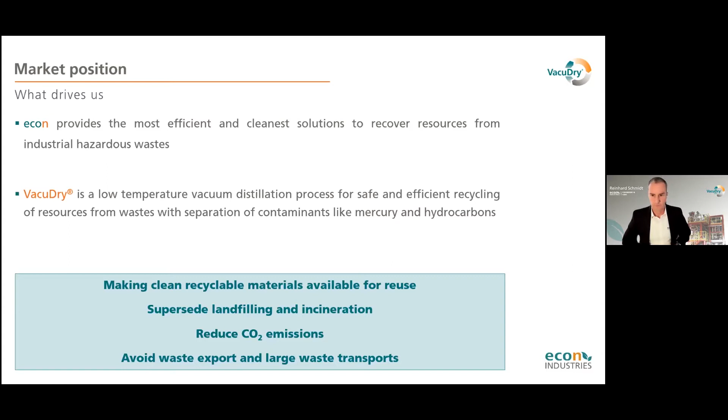Econ was founded in 2003 as a machinery supplier. We are based in Germany, in the southern Bavarian part between Munich and the Alps—a very nice area, by the way. We have been winners of the Export Award of the Bavarian Ministry of Economy in 2018.

We have representatives in many countries, amongst others in the UAE, Australia, Canada, China, and Russia. Internationally, we are very much involved in international working groups, like in the UN, and especially with our mercury activities in the Minamata Convention meetings. This is all based on our VacuDry solutions, where we separate the contaminants and pollutants from industrial wastes.

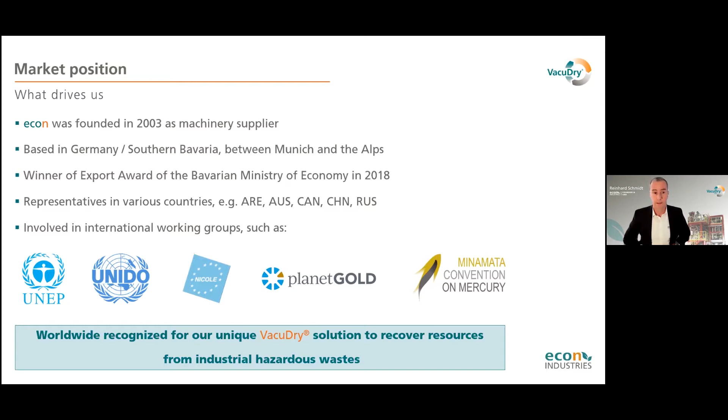Over the years, we have delivered all in all 30 hazardous waste treatment projects, of which 16 are based on VacuDry technology.

VacuDry plants are based on 3 different continents today, in 12 different countries. More than 1,500 tons of solid and pasty industrial wastes are recycled every day in our VacuDry units worldwide, mainly hydrocarbon and mercury-based wastes.

We have experience and knowledge with over 500 different waste streams that have already been treated in these units, including contaminated crushed building rubble and soils, landfill residues, tank sediments, sludges, filter cakes, centrifuge cakes, spent activated carbon and catalysts, and even now metal-containing chips and grinding swarf.

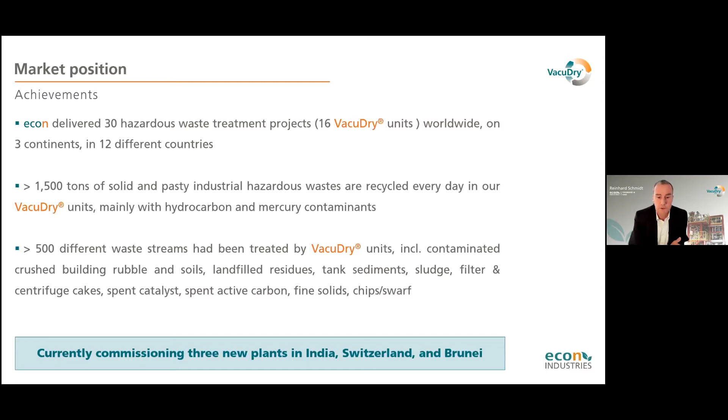At the moment, we are currently commissioning 3 new plants in India, Switzerland, and Brunei.

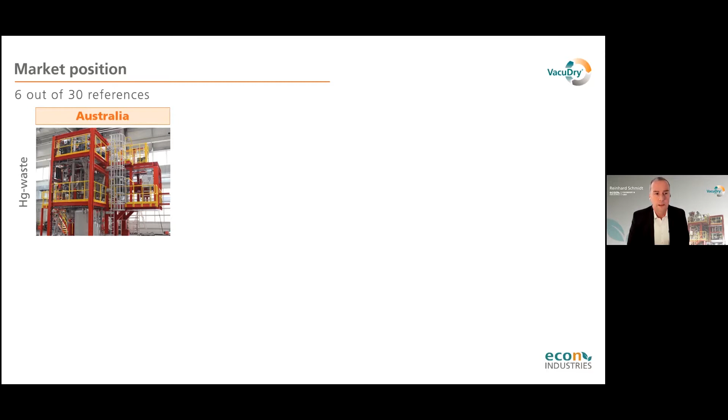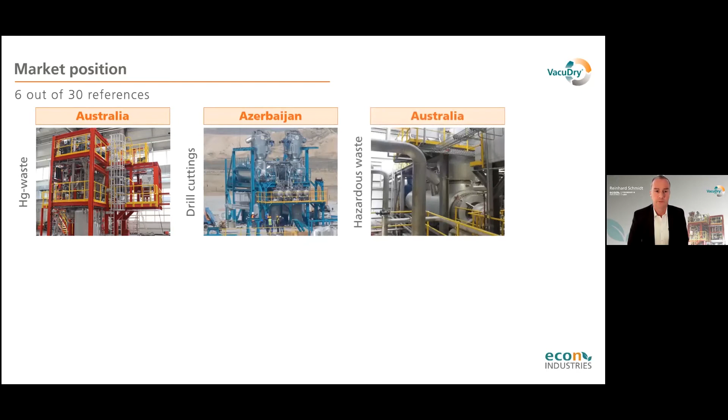Just to show you 6 out of our 30 references: a mercury waste treatment plant in Australia, a mid-sized one, not that large. The next one is 2 drill cuttings treatment facilities in Azerbaijan, dealing with 70,000 tons per year of drilling wastes. Also hazardous waste treatment in Australia, in the Melbourne area, and in Germany, for almost 10 years now, metal sludge treatment, especially grinding swarf from car and bearing manufacturing.

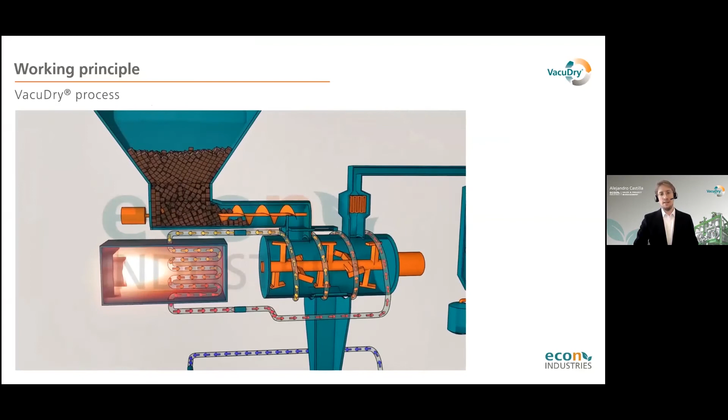I will start with the working principle, with a short video, and in between I will explain how this process actually works. The first step starts with the filling of the unit inside the batch-wise working evaporator, which can range from various types of sludges to contaminated soils and in general more weathered material. During the filling, the auger of the evaporator is rotating, and thanks to the connected shovels, the material is homogenized and equally distributed inside the evaporator.

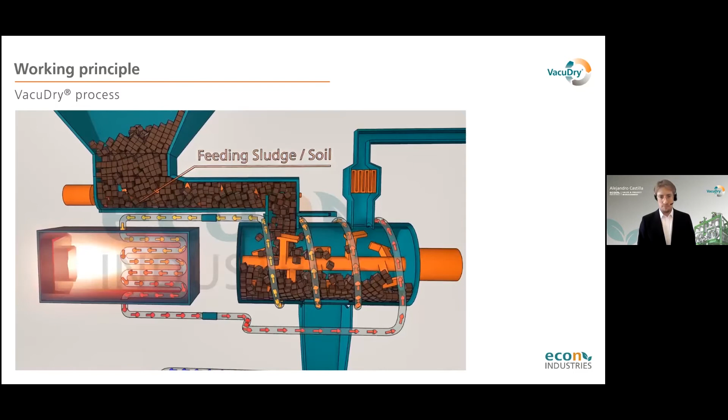Once the filling is complete, a vacuum gate between the filling system and the evaporator gets closed. There is thermal oil flowing in a heating jacket around the evaporator and also in the central shaft, so the material is indirectly heated. It's also important to highlight that the same temperature is applied to a vapor filter system sitting directly on top of the evaporator, which avoids fine material or fine particles passing into the condensation unit.

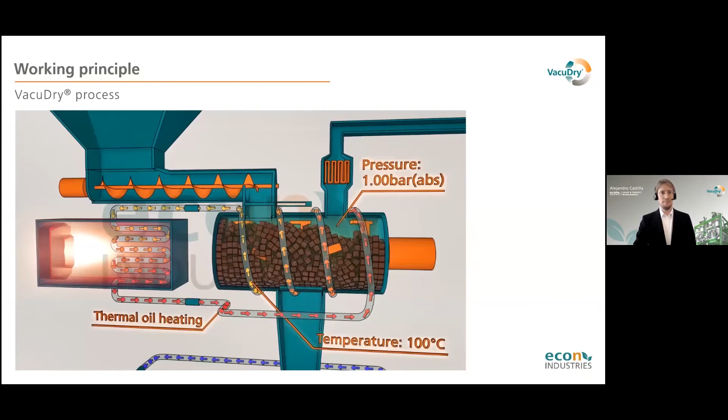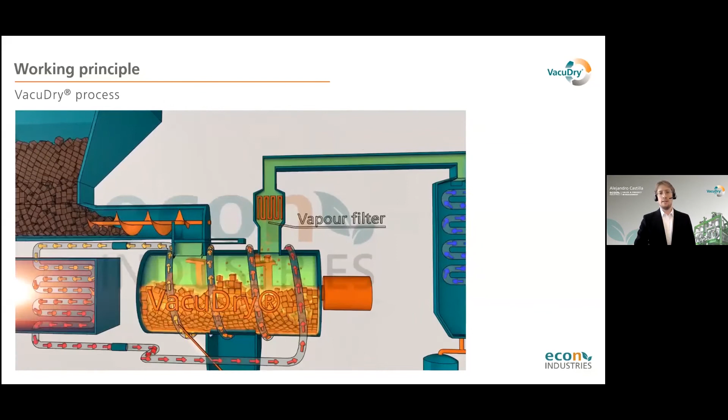During the VacuDry process, the pressure is set to around 50 millibar absolute, and as the temperature rises, the water and different contaminants start to evaporate. The thermal oil has a maximum heating temperature of 400 degrees Celsius, representing an effective material temperature of up to 350 degrees. But considering the vacuum, this corresponds to an evaporation capability at atmospheric pressure of around 450 degrees. In other words, we require on average 4 times less energy than other desorber types.

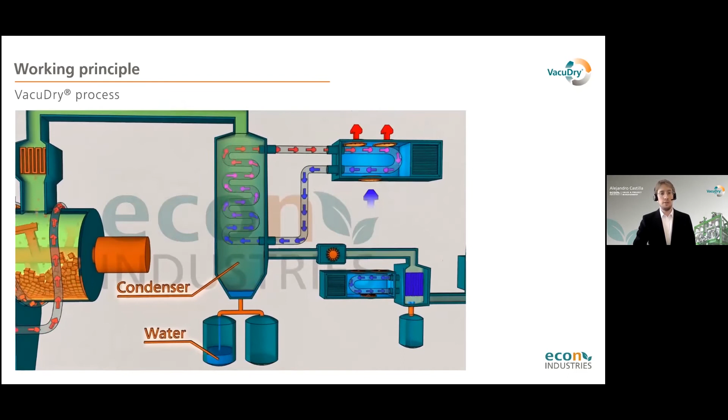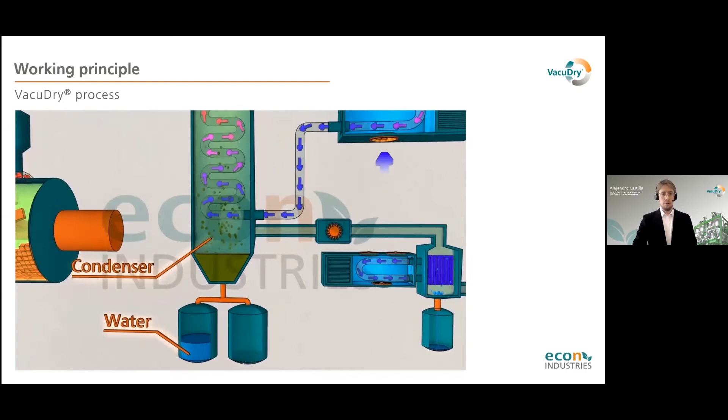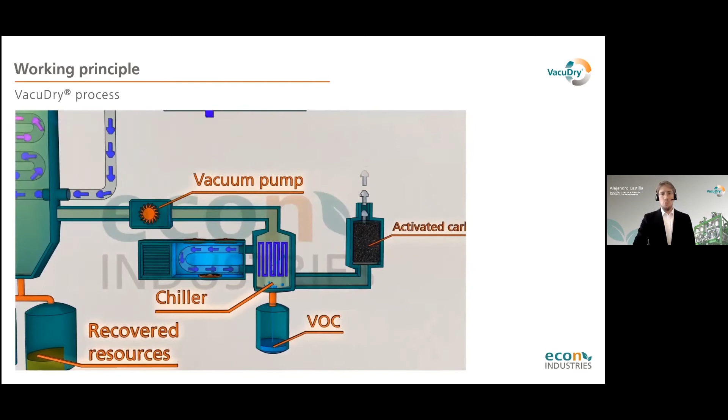The first evaporation and condensation phase belongs to the water content present. Once the material temperature keeps rising, other resources get recovered, so substances that before were contaminants now are recovered resources. The remaining vapors pass through a powerful vacuum pump system where a chiller allows collection of volatile organic compounds, and an activated carbon filter follows before finally releasing the exhaust into the atmosphere.

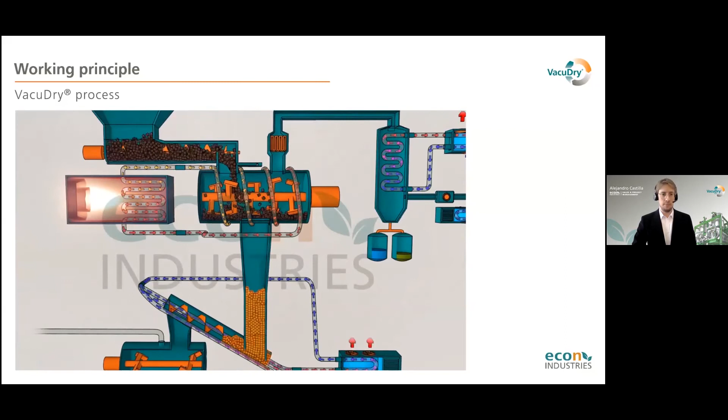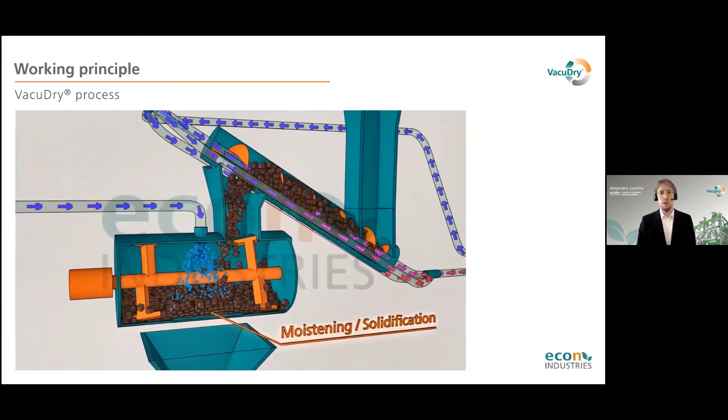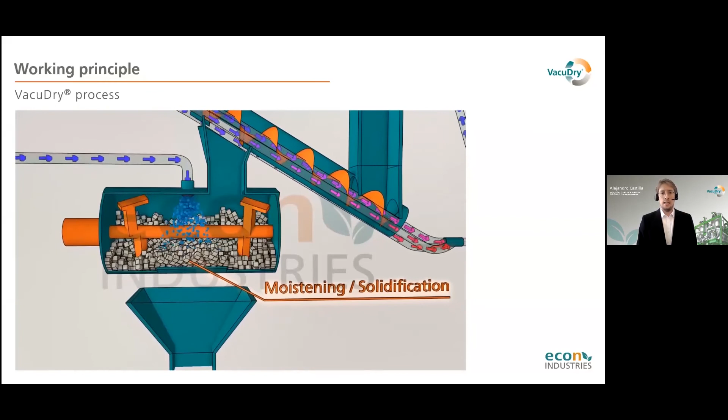Once the batch is finalized, the material drops into the discharge unit and the filling of the next batch takes place. The material has a temperature of around 330 degrees and it needs to be cooled down, so we use cooling screw conveyors and drop the temperature to below 80 degrees. For some customers, it is important to get moisture back into the material so it is not dusty, and this can be done using the water that was condensated and recovered in the previous stage. This way we also have the clean solids.

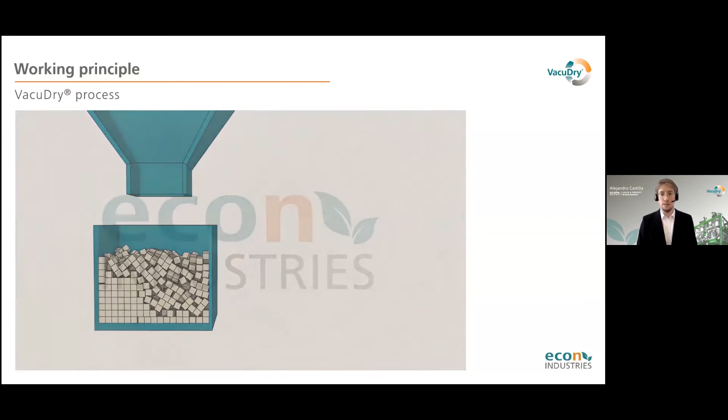Now, another way of presenting the working principle of our plants: this is a flowchart, and I like this version a little more because it shows the modulars, the different modules of our plants. All our plants are executed in a modular design, to reduce transportation costs and to enable fast commissioning and installation on site.

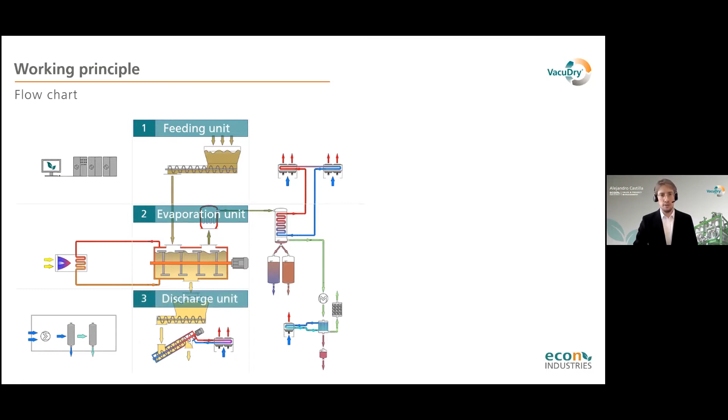The first unit is the feeding unit. Then we continue with the evaporation unit, the discharge unit, the condensation unit, the thermal oil unit, the operating resources module which consists of the instrument air and nitrogen generation and distribution system—for example, for the treatment of oily wastes we need nitrogen in the process—the cooling unit, and finally the control unit. Now I want to speak in more detail about the evaporation unit and the condensation unit. Further units will be explained in other webinars once we tackle specific applications such as metal wastes or oily wastes.

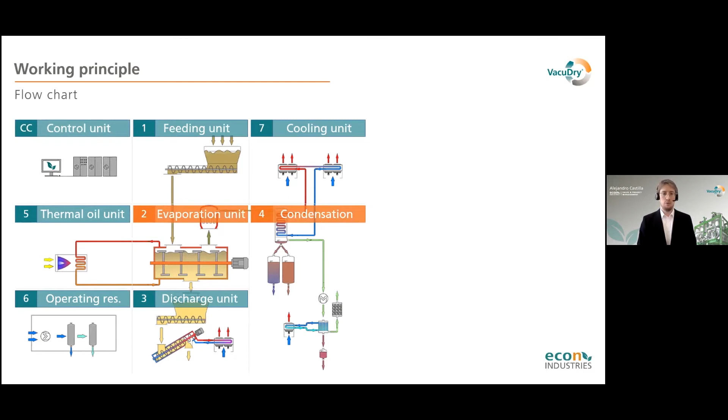Here you can see an example of the installation of a VacuDry 12,000 evaporator. The 12,000 refers to the gross volume of the evaporator, so we're talking about 12,000 liters or 12 cubic meters. We build evaporators ranging from 1 cubic meter up to 15 cubic meters. On the right side you can see the vapor filter system, and in that particular case we have 2 units working in parallel, which is why you have 2 evaporators directly next to each other.

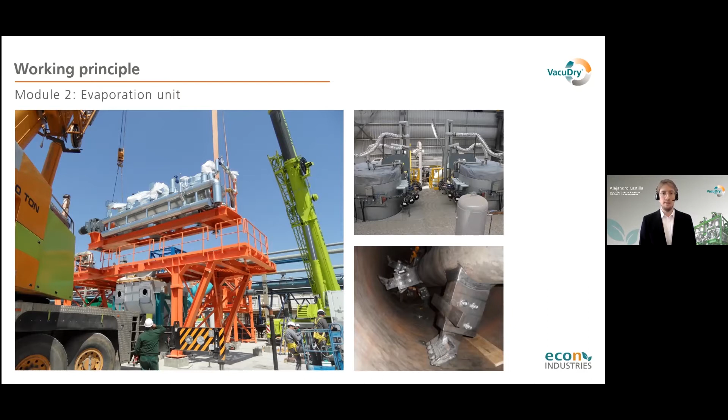In the bottom picture you have the heavy duty design of our evaporators, showing the central shaft and the connected shovels. It's important to highlight that the minimum wear is mainly due to the slowly rotating parts—by slowly rotating I mean around 5 turns per minute.

Next slide, please. Here are 2 examples of the installation of condensation units. The condensation unit in general allows us to recover water and oil and other resources as separate fractions. We also have automatic discharge to storage vessels, as you can see in the bottom right side of the pictures.

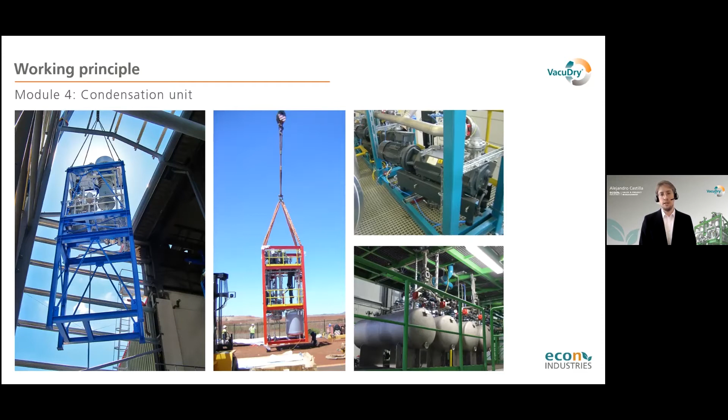Our systems also count with redundant vacuum pumps—for example, you can see there are 2 pumps next to each other, so in case one stops working for any reason there is always a backup. Also, our process design allows maintenance of critical parts during operation.

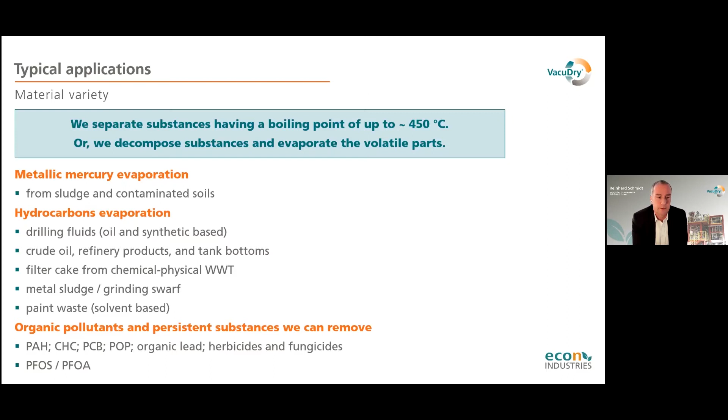Typical applications means we also want to show you the accordant wastes that we can treat. Here we see first mercury-containing soils and wastes on the drier side. Second, grinding swarf, paint wastes and refinery wastes, tank bottoms - more liquid, pasty wastes with high hydrocarbon amounts. We see centrifuge cake and contaminated soils.

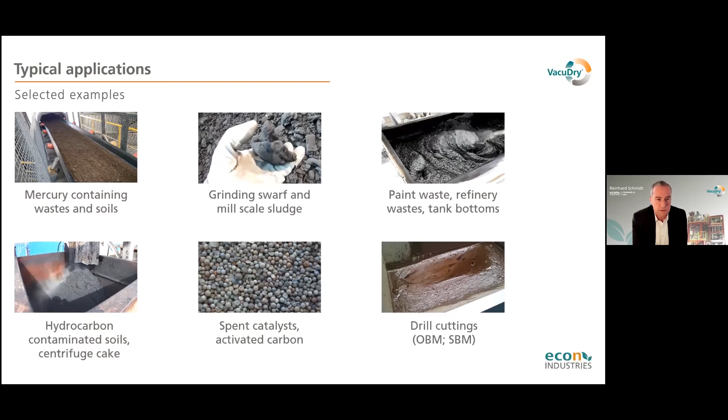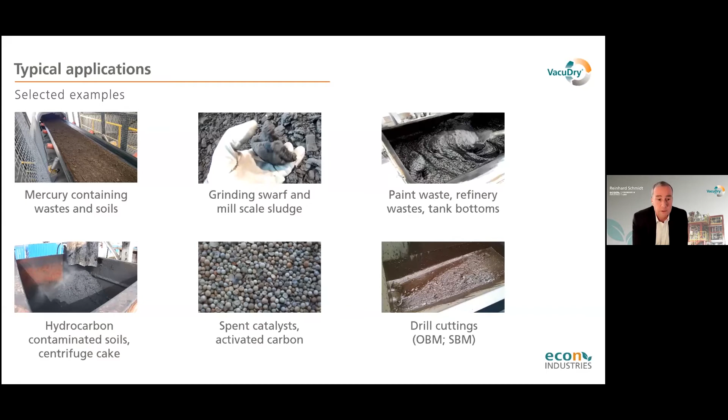We see spent catalysts and activated carbon, and last but not least, nice pumpable drill cuttings, oil-based mud, synthetic-based mud. All these wastes can be treated in the same VacuDry unit - you don't need different plants to treat different waste streams.

The industries we serve - of course we serve most industries that generate hazardous wastes. That's a unique technology for many different types of waste streams. What's important to know is that we treat batch by batch, no need to blend the wastes. So we serve the chemical industry, especially for solvent-based residues and mercury-containing residues.

Especially new applications are the recycling of non-ferrous metals like copper, from copper catalysts for example. Also rare earth materials have been treated and cleaned in our units.

Oil and gas industry - I think I've talked enough about this. Metal-containing sludges is also an upcoming waste stream becoming more important, to substitute co-incineration of grinding swarf. We can do recycling of these kinds of metal sludges, which mainly come from machining operations. Mill scale sludges from the steel industry can also be treated.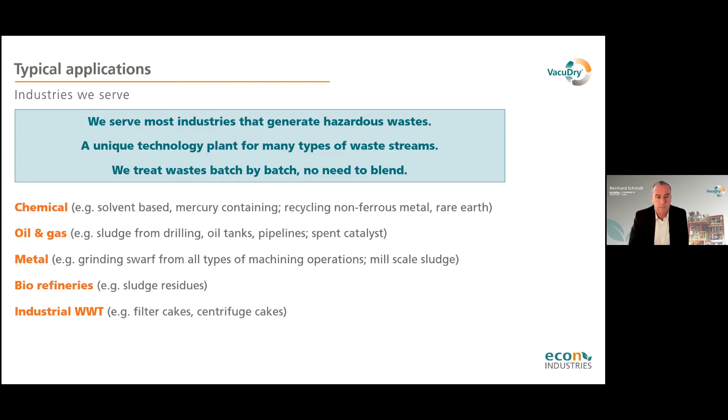In biorefineries, a lot of different sludges occur, residues where we can remove the oil and gain dry solids. Industrial wastewater treatment in general, the filter cakes created there, especially in chemical physical wastewater treatment, are one of our major waste streams that we are working on.

Talking about industrial wastewater treatment and the accordant filter cakes, this is a typical application - a unit that we delivered to Melbourne 5 years ago. VacuDry, in this case, terminated the final disposal of 20,000 tons of hazardous waste in landfilling. We recover the water and hydrocarbons from these wastes and get back a non-hazardous material.

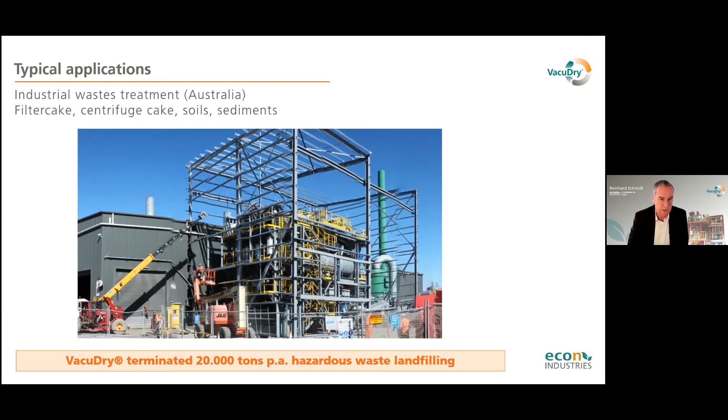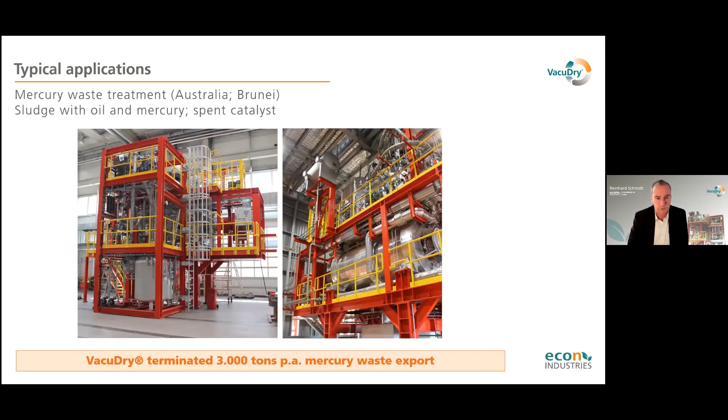With this unit, mercury waste treatment in Australia, we terminated the export of 3,000 tons per year of mercury waste from Australia to Europe.

With this unit, we recycle 14,000 tons of synthetic drilling oil from 70,000 tons of waste. This is based in Azerbaijan, where a large amount of drilling wastes occur from the oil and gas industry.

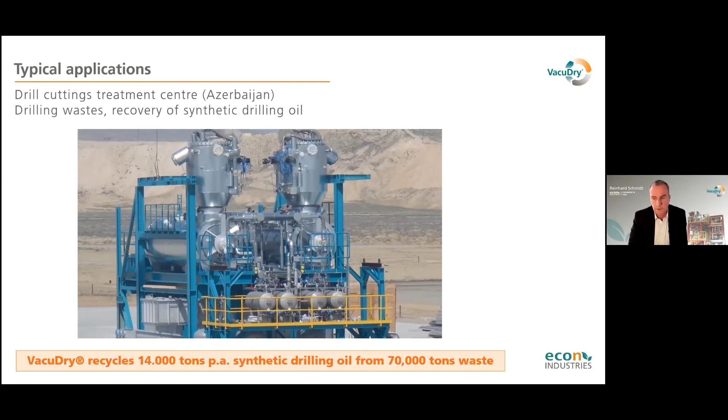With this unit, 100,000 tons of mercury and PAH contaminated soils have been treated on site for reuse, so that only a small amount of mercury and PAH left the site, and the rest of the soils were reused on site for building purposes.

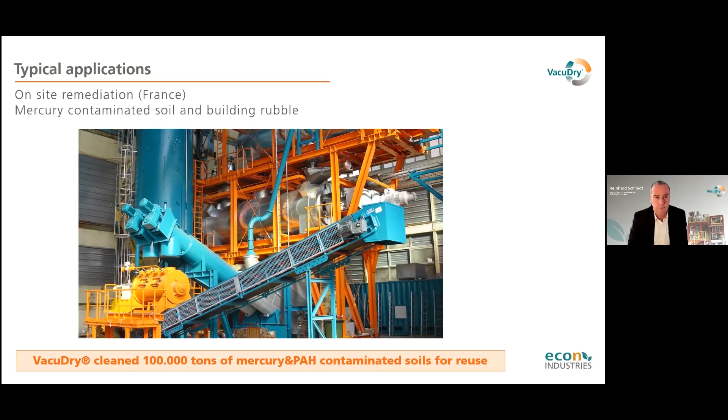Another plant, which will also start operation in Brunei soon, terminates 10,000 tons of co-incineration of oily wastes in cement kilns.

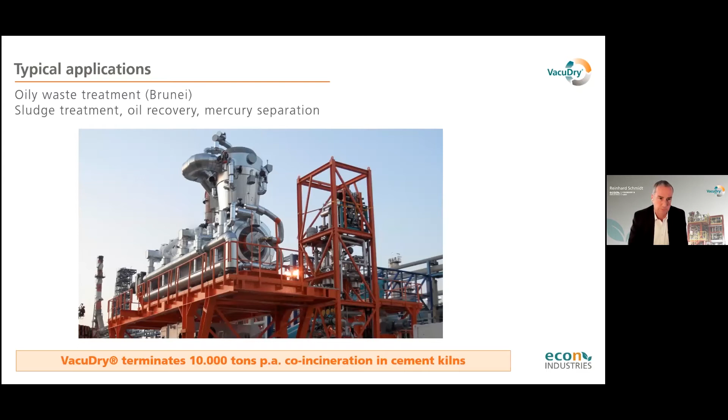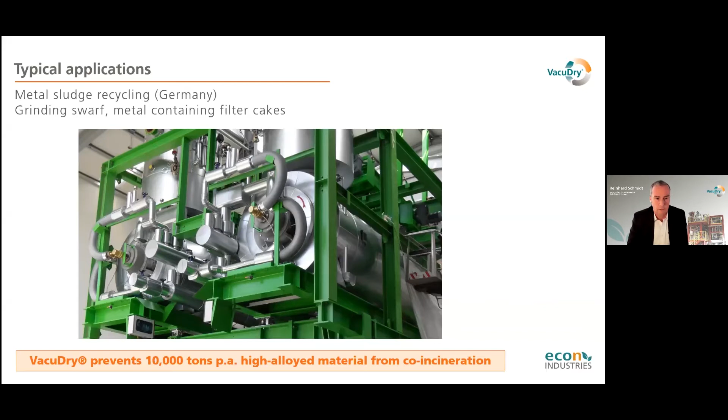Metal recycling, an upcoming issue with this plant in Germany that went into production already in 2011. It prevents 10,000 tons of high alloyed material from co-incineration, and finally the metal powder goes back into the melting process.

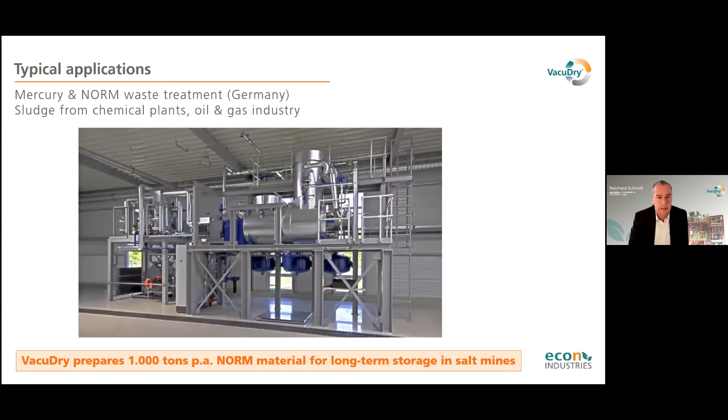So that's my part with regard to the applications. And now Alejandro will continue.

Thank you, Reinhard, for the insight into the many different applications and materials that can be treated through the VacuDry technology. I think it becomes clear that the technology has quite a bit of flexibility and can handle quite a few different materials. One of my favorites is how we separate mercury from contaminated soil in order to reuse the soil. But as you have seen, there's a lot more that the technology can do.

So talking about benefits, Alejandro will be up next, and he will tell us about the main benefits regarding the VacuDry technology. Alejandro. Thank you, Michaela. Thank you, Reinhard.

So with the main benefits, it is of course of our interest to present to you what this technology can bring. To make this easy to understand, I distributed this into technical and commercial advantages, with some detail on material treatment, operation, health and safety, and financing.

Related to material treatment in the technical advantages, as Reinhard mentioned, the input material flexibility means it doesn't matter how the material comes. If it's liquid, pasty, or solid, it can be treated in the same unit, in the same evaporator.

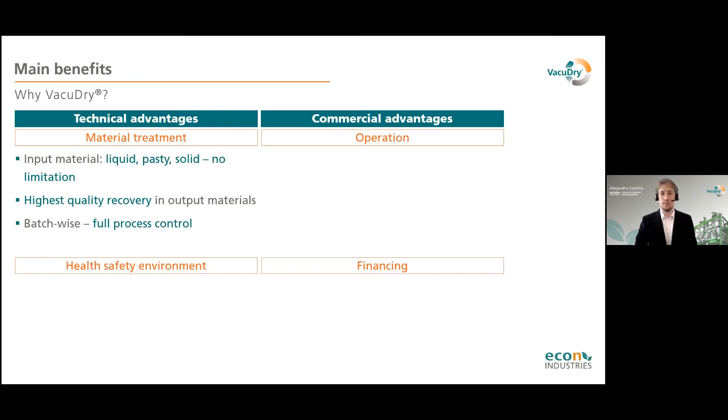Lastly, the batch-wise full process control. We are tracing boiling points, and whenever we know we are going to process a waste that requires a higher or lower temperature, this can be set so that we are really optimizing and maximizing the throughput capacity of the plants.

On the commercial advantages in operation, the staff required is actually 2 per shift: one operator sitting in the control unit, and one operator taking part in the feeding operation and keeping an eye on the discharge. In between, this operator can even be doing other work for other applications. So with a very small staff required, you are able to save some money there.

On technical availability, our plants have more than 7,500 hours. Routine maintenance is carried out every 2 months or so for around 48 hours. So this is really an operation that, even though it's batch-wise, can operate on a continuous basis.

On the health and safety side, we have the exhaust volume: our units only have exhaust emissions of less than 100 cubic meters per hour. When you compare this to other desorber types, you will understand why this is so significant. All our plants also have ATEX certification, protection against explosive atmospheres. Something that makes us very proud is that in these 17 or 18 years now, we have 0 accidents recorded.

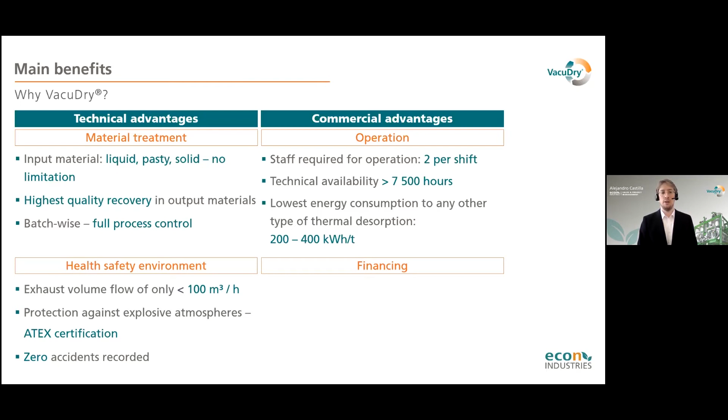In the financing section, we have an extensive network with German and European first-class banks, and this allows us to help you with export credit opportunities or finance lease to really make your project feasible. And from the banks' side, they of course love this, since our units can operate for more than 15 years.

So there is this relation where we can connect you with a financial institution and help you realize your project.

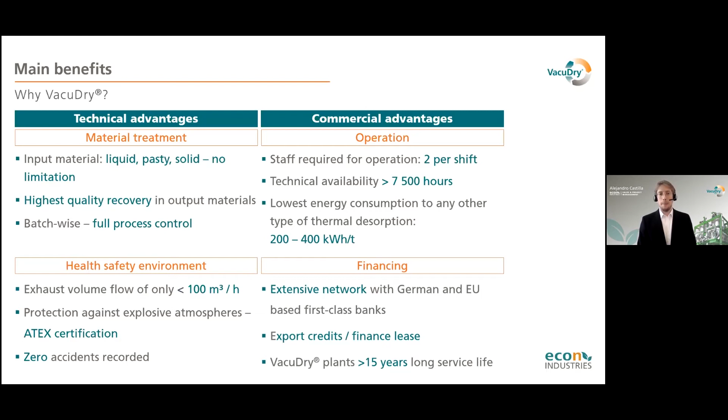In the next slide, I have one example from the oil and gas industry. Let's say oil-based mud or synthetic-based mud cuttings. Here you can see in the bottom picture the high quality of those oils or synthetic drilling fluids, if that's the application. This is mainly because there is no cracking or any process happening while we get the condensate. Also, all these units in the heating system can be fired either by fuel oil, diesel, natural gas, electricity, biomass. The possibilities are really, really broad.

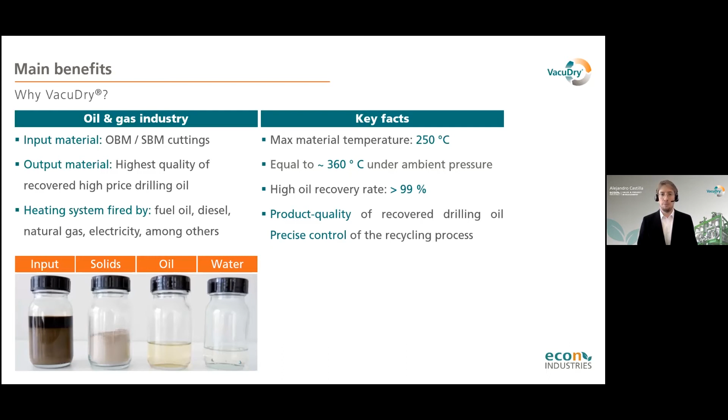Here, I would like to give an example with oil-based mud and synthetic-based mud. How is the reaction, or the effect, on the electrical consumption side and the thermal energy side? In the graph, you have two lines: the blue one corresponds to thermal energy and the green one to electrical consumption. Each of these points refers to a different material composition. It's important to highlight that the higher the solid content in the material and the lower the oil and water content, the less energy is required for each of these batches.

Once we combine this and take a look at the throughput capacity, that's where we see the real impact afterwards in the economics. In our case, we support your project not only by providing VacuDry technology, but we can also support you if you require advice for a mechanical separation process or pre-treatment process, such as a centrifuge, where you can bring the material from 60% solid content to maybe 70 or 80%, and then increase the throughput capacity and get the most out of our units.

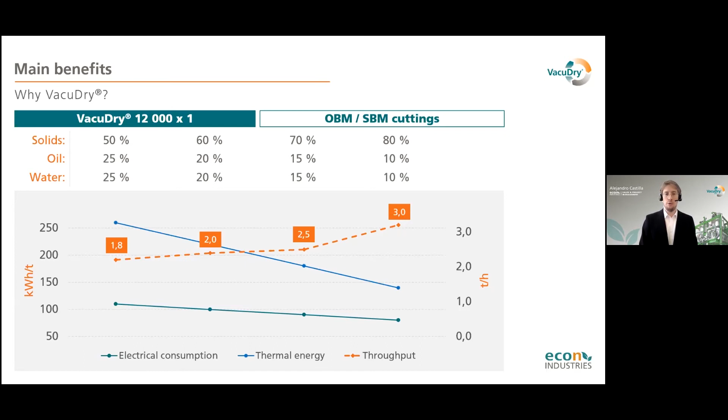Thank you very much, Alejandro, for showing us the main benefits, and especially with examples. I hope that this part has made it clearer for you what the benefits are and how it could be of use to you as well.

And last but not least, we will compare different technologies, and Reinhard will show us these.

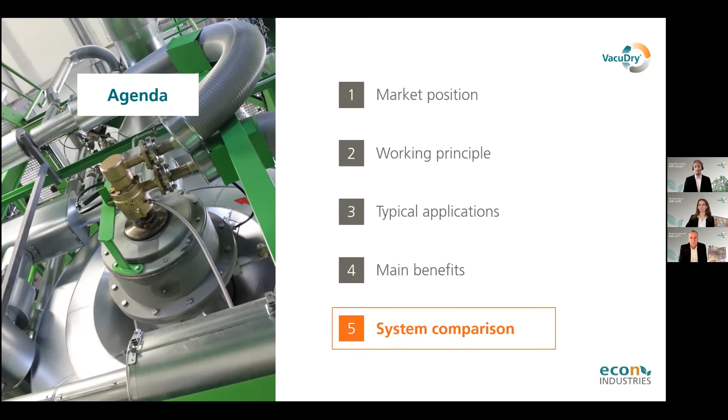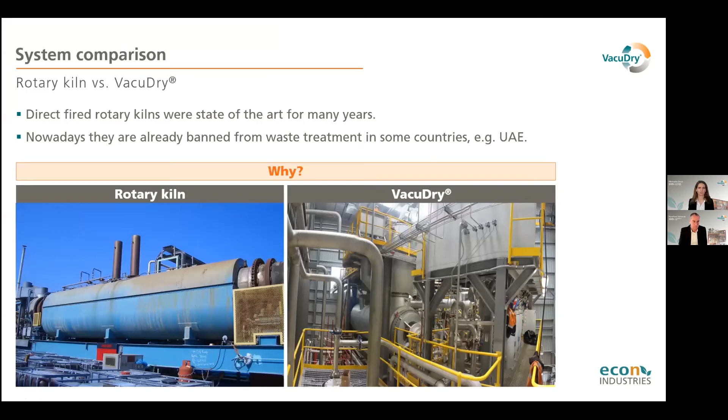Okay, thank you very much for all this further information about the benefits of the VacuDry process. I've seen in the Q&A and also in the chat a couple of questions around the technology and how it is used, and maybe how it compares to other desorber types. Maybe we can answer this a little bit by highlighting the difference between the use of rotary kilns and the use of VacuDry technology.

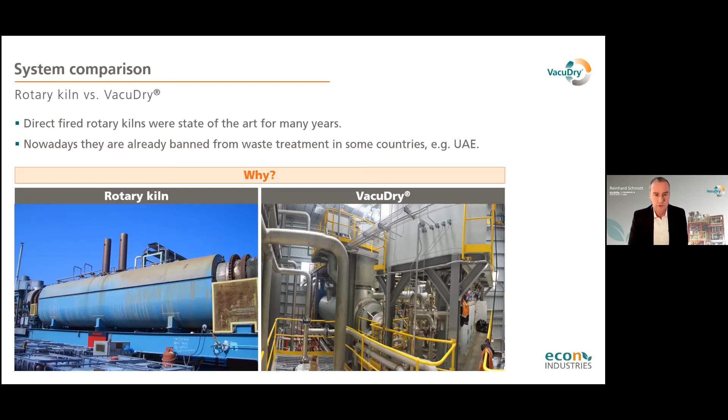One of the main competing technologies in the oil and gas business, as well as the soil remediation business, is the rotary kiln. As we all know, there are direct fired and indirect fired kilns, but there are still a lot of direct fired ones. Nowadays, more and more of these direct fired units are banned from waste treatment operations in some countries, for example in the UAE. So now the question is, why are these direct fired units outdated? Why are they banned in some countries? Now we can look into the differences in operating these units.

We are referring here to an example of treating oily mill scale at 30,000 tons per year. This could also be contaminated soils, or filter cakes. It's just an example, but the significant differences between the systems remain more or less the same.

As we learned from Alejandro before, the input material flow into desorber types based on rotary kiln technology is continuous. They usually need an almost homogeneous feed. Often blending with other wastes is necessary for the direct fired ones, especially to reduce the calorific value. With the VacuDry technology and the indirect heated process, we process the wastes batch-wise, so there's no need to blend the waste stream with other wastes. As long as we can get the material with accordant conveying equipment inside the unit, we can also treat it.

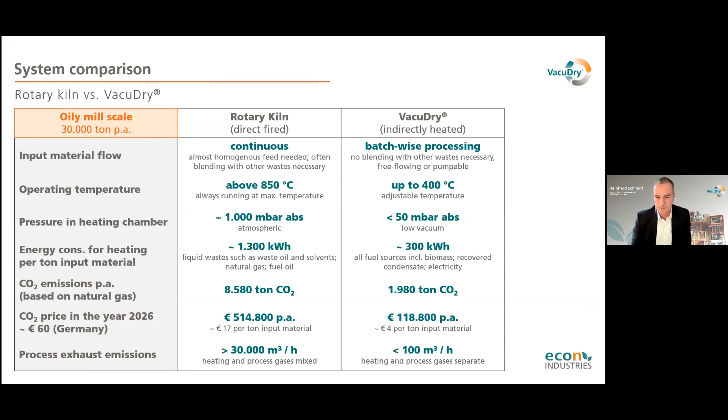However, Reinhard has already answered some of the questions, which is great, because that's going to be the next part. Now that we've learned how the technology works, what the benefits and typical applications are, and how it compares to other technologies, we would like to go into the questions next.